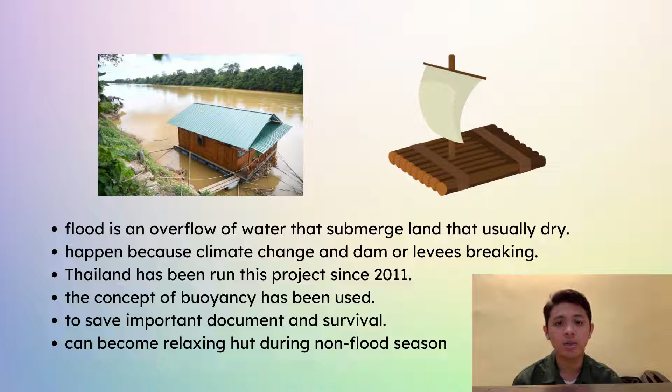Our neighboring country, Thailand, has already run this project since 2011. This project uses the concept of buoyancy to keep the raft house floating. The purpose of this project is to save important documents and for survival. This raft house is also intended to become a relaxing hut during the non-flood season.

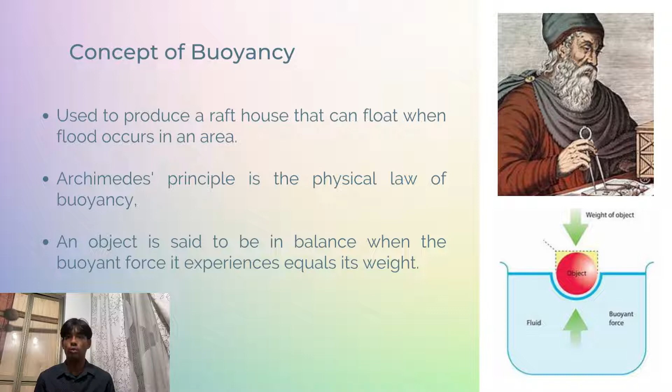For the walls of the raft house, we chose the most suitable wood, which is cedar wood. Why did we choose cedar wood? This is because cedar wood is one of the best water-resistant woods. Other than that, cedar wood is more durable than many other woods and has a relatively high compressive and bending strength. Cedar wood has dimensional stability and can be used in construction, flooring, and furniture.

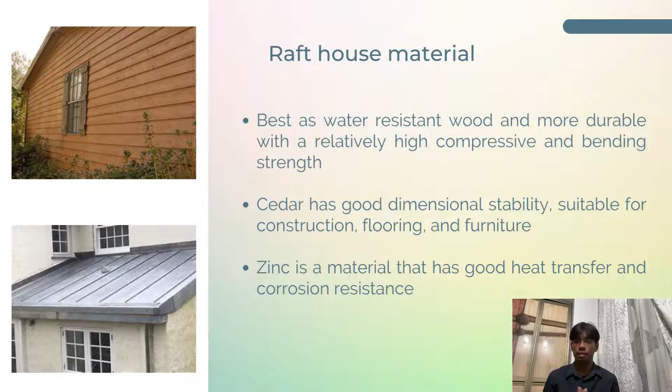So for the roof, we chose zinc. This is because zinc is a material that has good heat transfer and corrosion resistance. The characteristic of zinc will efficiently absorb heat from sunlight and also efficiently release it down into the living space.

To make sure the raft house stays afloat, we decided to use expanded polystyrene, or EPS, as a material that can float due to its characteristics and properties in line with the concept of buoyancy. EPS geofoam is super lightweight, having a density of about 1% of the density of soil. Other than that, we chose EPS because of its moisture and water resistance. The material does not absorb certain substances when exposed to them, maintaining its capacity to function as an insulator.

To make it bigger, EPS foam that floats is used because of its capability to hold up a huge mass value produced by the raft house. EPS can support a lot more weight due to the excessive weight of the floating structure.

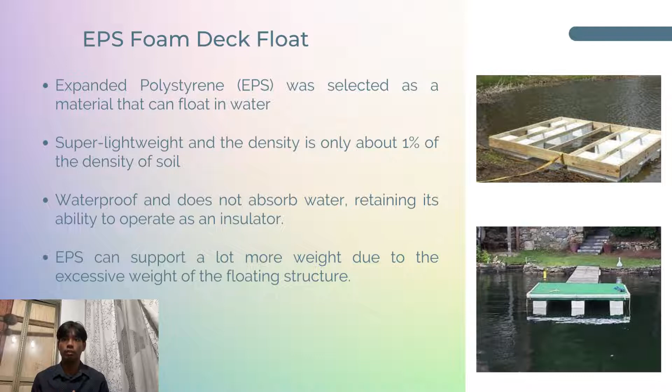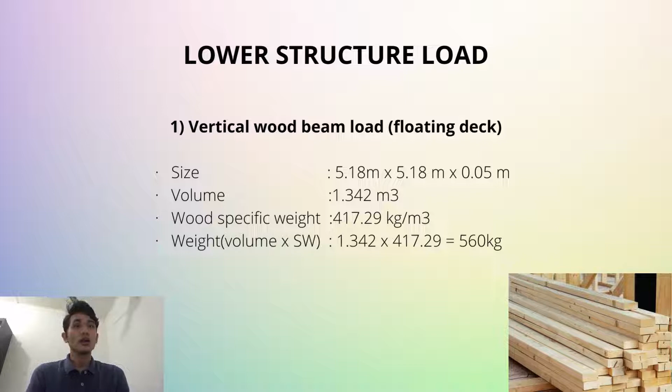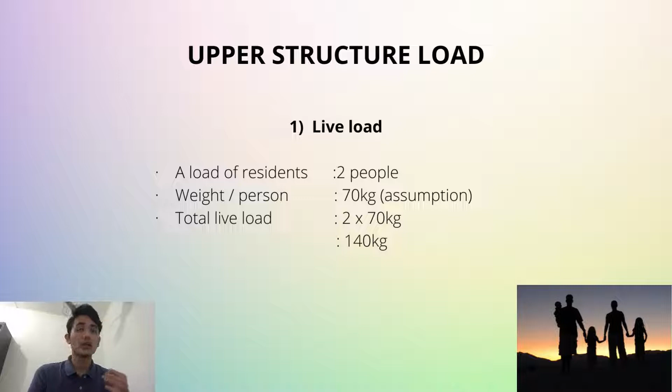Next, we move to upper structure load. We have live load, and we can put 2 people in the raft house with an assumed weight of 70 kg each, so the total live load will be 140 kg.

In the upper structure load, we also have household items load. We have 12 items in this raft house: generator, refrigerator, television, stove, safety box, cabinet, fuel tank, mattress, cooking utensils, first aid kit, and extension wire. All of these items weigh only 900 kg.

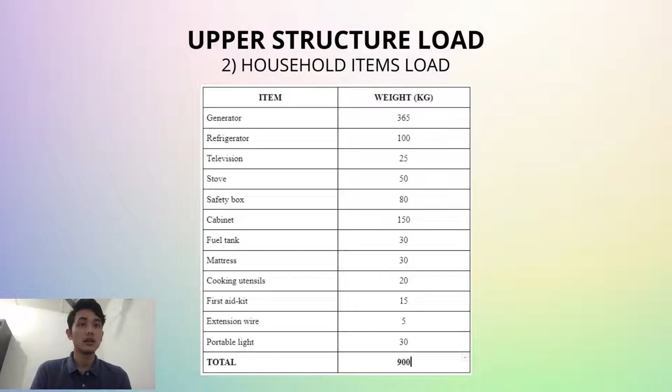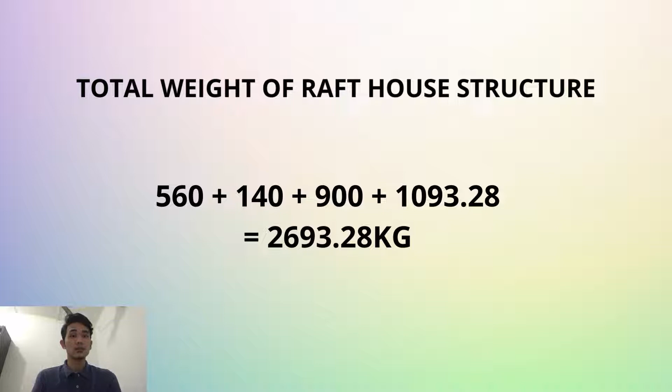Lastly, for the methodology, we have the total weight of the raft house structure. First, for the platform, we got 560, plus the total weight of live load, which is 140, plus the total household item weight of 900, and for the last one is the structure load of the raft house such as door, window, or anything else. We got 1093.28.

For the analysis and calculation, we use the formula of Archimedes principle, which is mass loading equal to density multiplied by area of submerged and submerged height, and will be subtracted with the total mass of floating material.

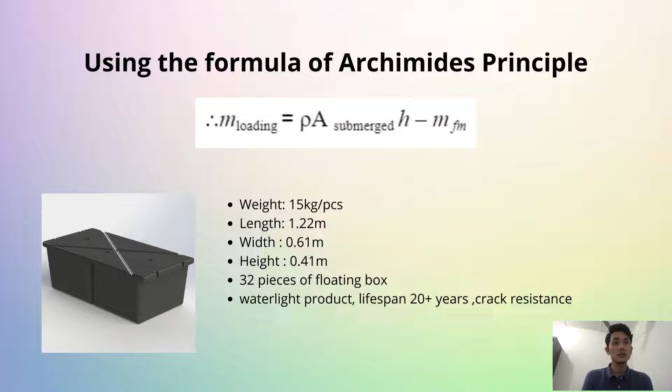For the floating agent, we use the dock float box, which has a weight of 15 kg per piece, length 1.22 meter, width 0.61 meter, height 0.41 meter, and we use 32 pieces of floating box. This box has a waterlight product, lifespan of 20 years, and has crack resistance.

Okay, this is some example calculation that we have made. First, for the submerged area, we calculated the area that will be submerged into the water, and we got the area for submerged is 23.81 square meters, and for the submerged height we got 0.205 meter, and for the total mass of floating material, we got

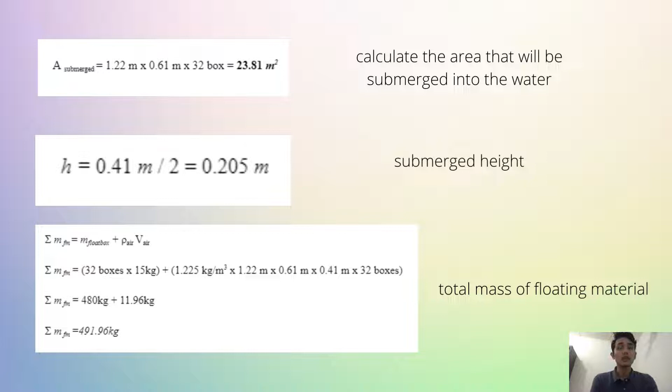491.96 kg. Okay, this is the maximum capacity that cannot be exceeded by the Raft house, to make sure it is safe to float on the water.

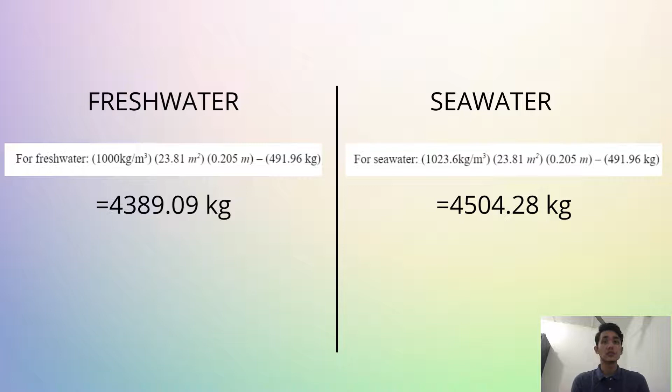For the freshwater, the maximum load capacity that can be used is 4,389.09 kg, and for the seawater, the maximum capacity is 4,504.28 kg.

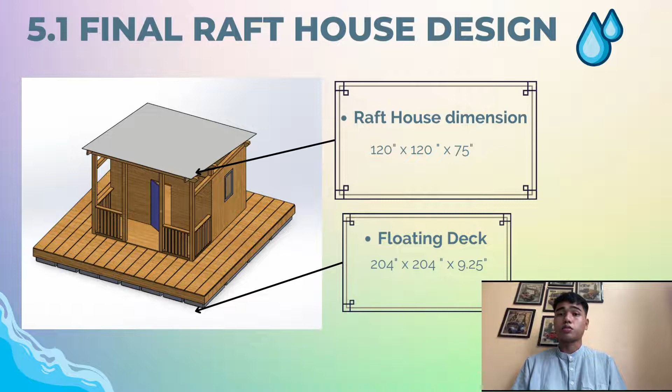For our Raft house, it had two parts, that is Raft house structure and floating deck. For Raft house, the dimension is 120 by 120 by 75 inch, and floating deck dimension is 204 by 204 by 9.25 inch.

Finally, list of building material. For this list, it had 8 parts, which is house floor, wall, roof truss, roof panel, window, hollow wood door, floating deck, and EPS float deck.

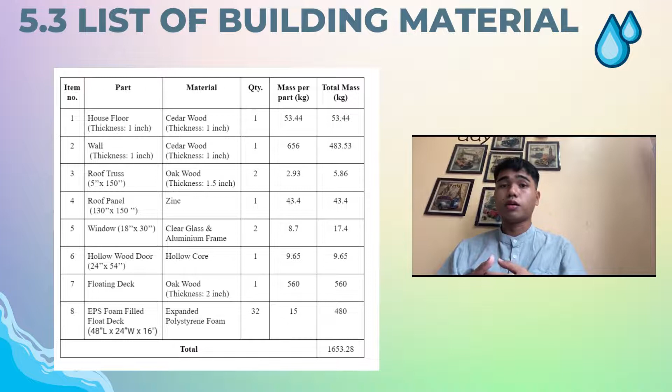And the total mass of this Raft house is roughly about 1,653.28 kg.

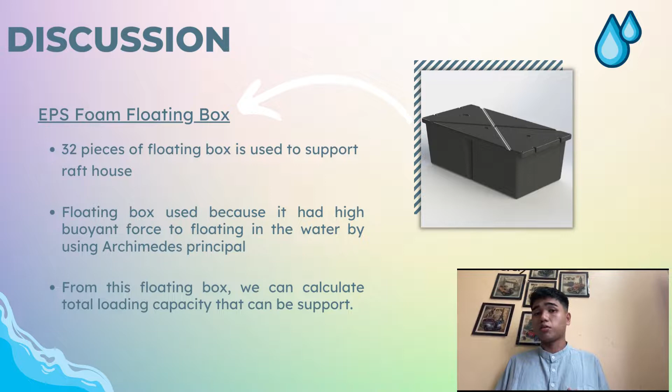In this project, the displacement of the fluid is determined by the Raft house with household items that push out a volume of water, making the volume of water and the Raft house equal. Due to that, the floating box is used because it has high buoyant force to float in the water by using the Archimedes principle. From this floating box, we can calculate the total loading that can be supported by the floating box.

Then, based on analysis and calculation, we can discuss that the floating box can support loading around 4,389.09 kg for freshwater and 4,504.28 kg for seawater. So if the loading added exceeds the amount of loading capacity that can be supported, the raft house will easily sink.

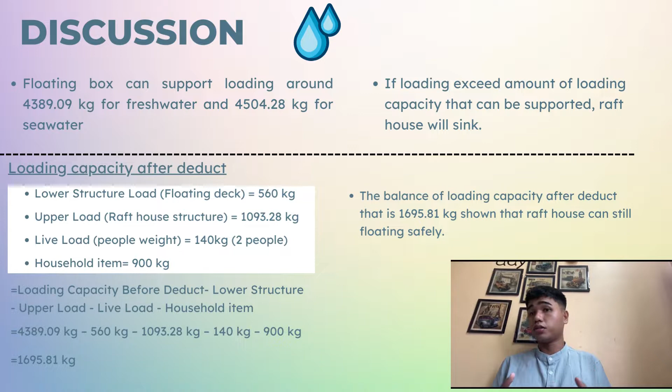To find the loading capacity after deduction, we deduct the lower structure load, upper load, live load, and household item loading capacity from the amount before deduction. So after we deduct all this information, we get 1695.81 kilogram. So the balance of this loading after deduction is 1695.81 kilogram, showing that the raft house can still float safely.

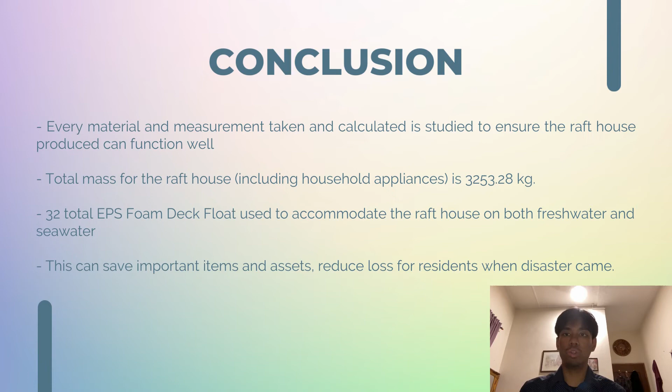So the fact that this raft house exists shows how beneficial it is for locals to be better prepared for disaster. This can save valuable goods and items, preventing residents from suffering significant losses. We hope that all the theories and ideas we've learned about fluid mechanics will be put to use and benefit our community more.